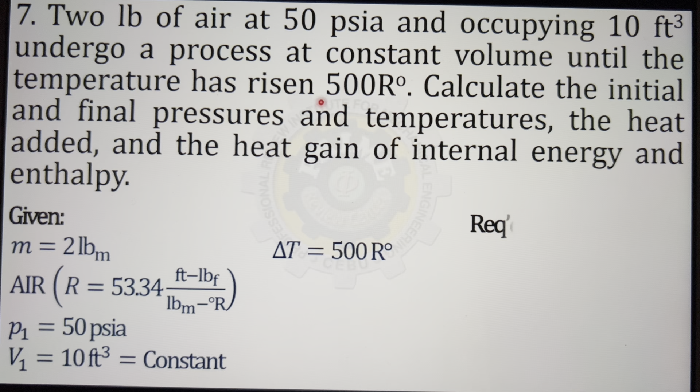So, ito yung mga required natin. Ano yung mga temperatures? Okay, yung pressures. So, pressure 1 is nasa given, so hindi na natin kailangan kunin. Heat, change in internal energy, change in enthalpy.

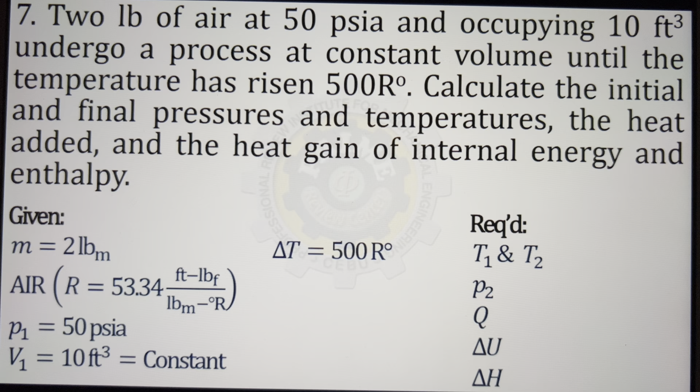Okay, so let's start muna dun sa ating temperature 1. So for temperature 1, according to the given, halos lahat ng given ay involve ang point 1. Kita naman natin. So ang formula na gagamitin natin is PV = mRT. Okay, point 1 tayo.

So substitute natin, we have 50 pounds per inch square. Conversion, meron tayo 144 inch square per feet square. Okay, kung ayaw nyo na maglagay ng unit, tandaan na rin yan. So magka-cancel yung mga units, that is inch square, cancel. Cancel ang feet square, so may iwan dito, feet lang. Then on the right side, we have pound mass, cancel.

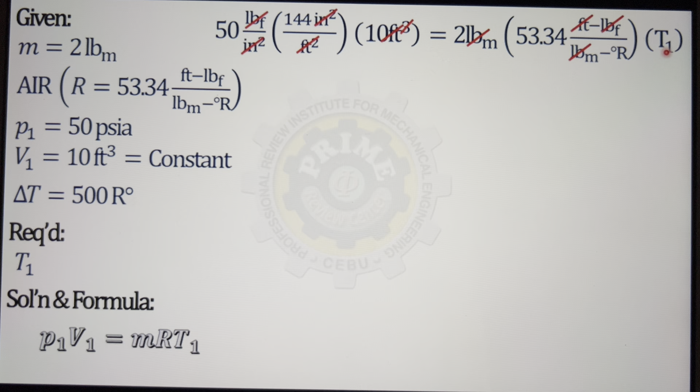Then, yung ating left side and right side, parehas may feet. So, cancel. Parehas din may pound force, cancel. So, maiiwan ang unit ng temperature natin. This one, nasa baba yan. So, pag lumipat sa kabila, that would be degrees Rankine. So, we have temperature 1, 674.92 degrees Rankine.

Tuloy lang tayo for temperature 2. Ito, mabilis lang to kasi binigay sa problem yung change in temperature. So, ilagay na natin dito. Yan yung formula. Change in temperature, sinabi risen sa problem. Kaya pag risen, mas malaki ang T2. Kaya T2 minus T1 tayo. So, we will arrive to our answer, 1,174.92 degrees Rankine.

Next, we have the pressure 2. For pressure 2, nakuha naman natin yung dalawang temperatures. Then, sa given may pressure 1. Take note, that is constant volume. So, gamitin natin ang Gay-Lussac's law. Ito yung formula. So, we will arrive to our answer, 87.04 psia.

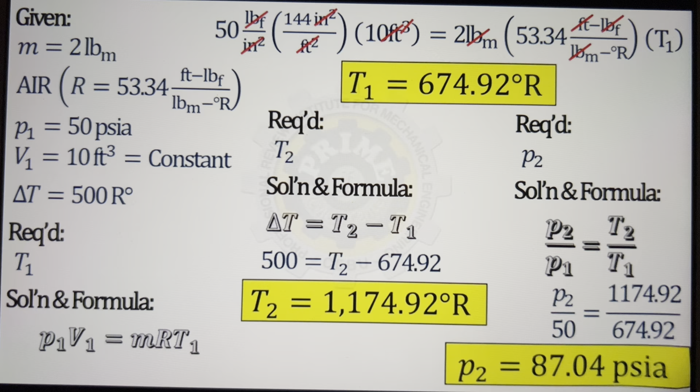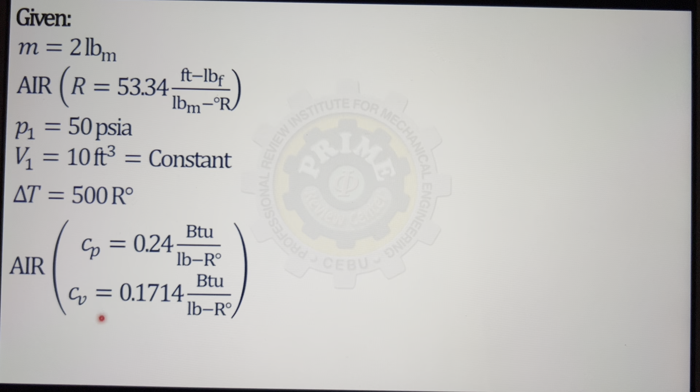Okay, so tuloy lang natin. Ito yung given pa rin natin. Then, madadagdagan lang tayo ng given. When it comes to air, kailangan alam natin itong mga specific heat na to. We have 0.24 pag specific heat at constant pressure. Meron tayong 0.1714 kapag specific heat at constant volume.

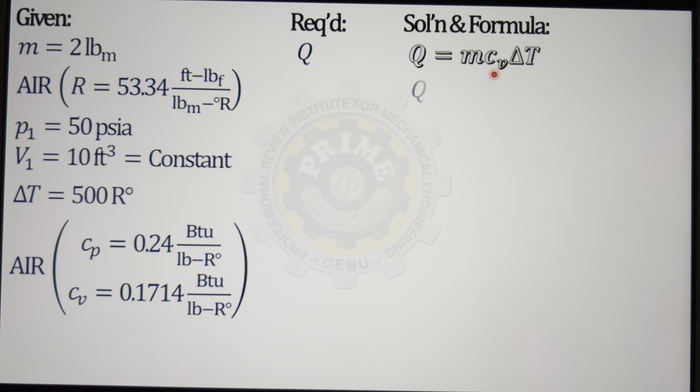So, ang required naman natin ngayon is the heat. Ang formula ng heat at constant volume is mCv delta T. Substitute. Okay, we have the answer, 171.4 BTU.

Then for the change in internal energy, hindi naman bago yung formula na yan, fix yan. Ang formula is mCv delta T rin. Kaya lang, familiar na to. Ang mCv delta T, eto din yan. So, pwede na sabihin, delta U is equal to heat. Take note that is for constant volume process. So, delta U natin is same, 171.4 BTU.

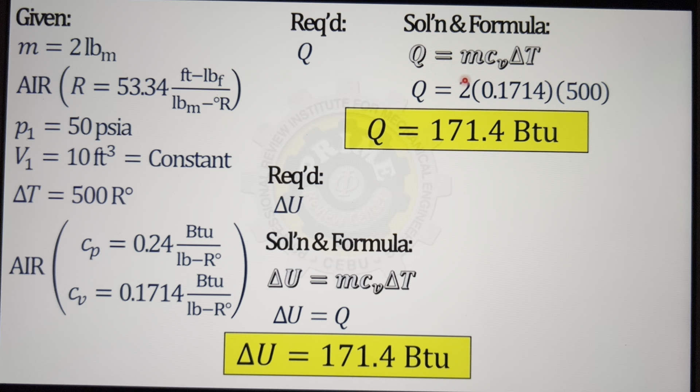Okay, so for change in enthalpy naman, fix ang formula niyan, mCp delta T naman. Substitute natin, lalabas ang delta H, 240 BTU.

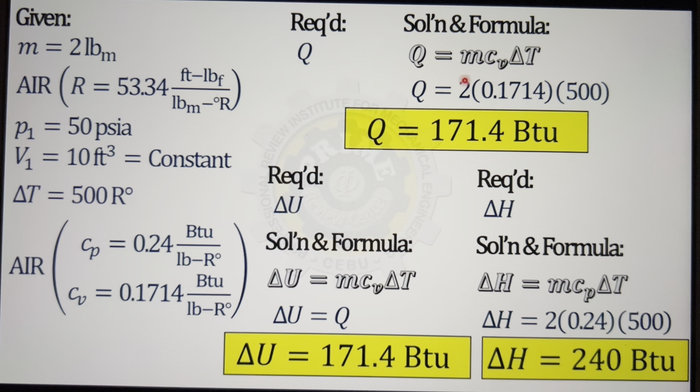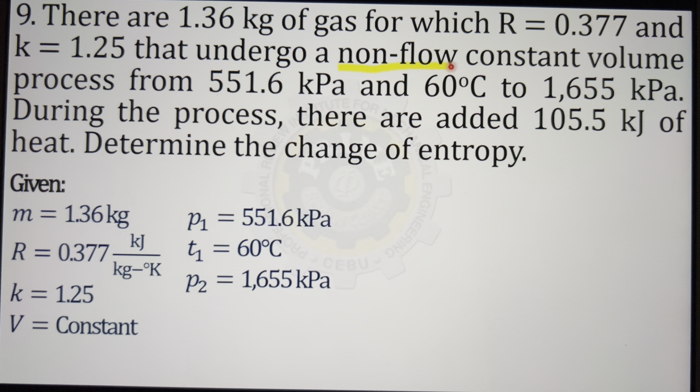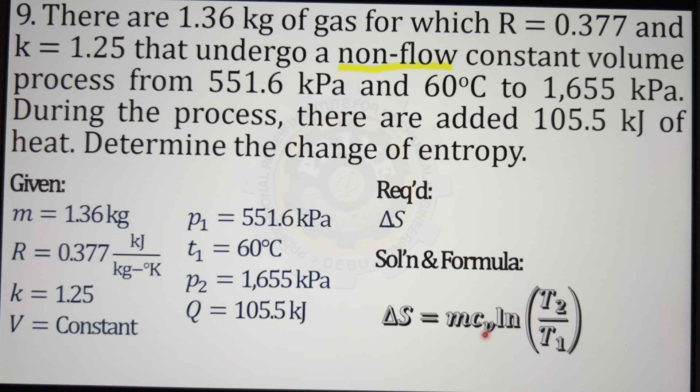k natin is 1.25. Sinabi sa problem constant volume at hindi lang yun, binanggit din ay non-flow. Pressure 1, 551.6 kilopascal. Temperature 1, 60 degrees Celsius. Pressure 2, 1,655 kilopascal. And heat, 105.5 kilojoule. Ang required is the change in entropy. So, ang formula gagamitin natin, constant volume process, isometric. May mass na binigay. So, m Cv ln T2 over T1.

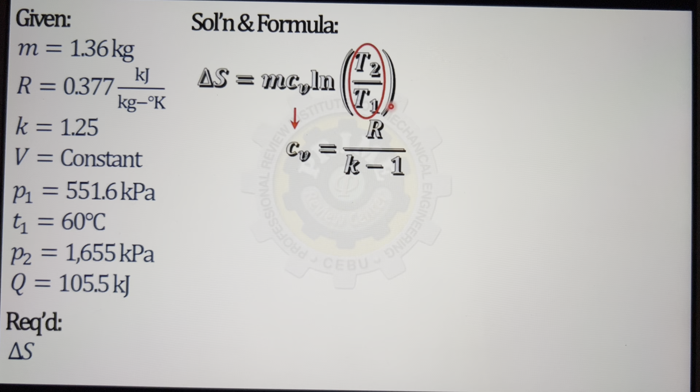Okay, hindi natin alam yung gas, kaya hindi natin masasabi agad yung Cv. So, to solve for Cv, ito ang formula. And meron namang R na binigay. And at the same time, wala ring dalawang temperature. Nasa constant volume process tayo. Ang mangyayari ngayon sa temperature ratio natin, papalitan natin ng pressure. Kasi constant nga volume, so partner niyan, pressure. So, ito yung equation na yan.

So, substitute na natin. Direct na. Ito yung Cv na part. Ito yung ratio ng pressure na ipinalit dun sa ratio ng temperature. Lalabas, change in entropy 2.2534 kilojoule per Kelvin.